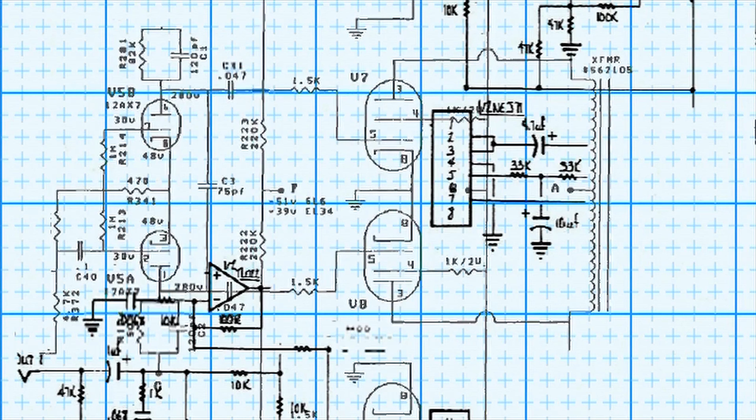The Paris Accords were created in response to this threat. They set a benchmark for countries to achieve carbon neutrality by 2050. While progress has been made, Canada seems unlikely to meet this goal unless drastic changes are made.

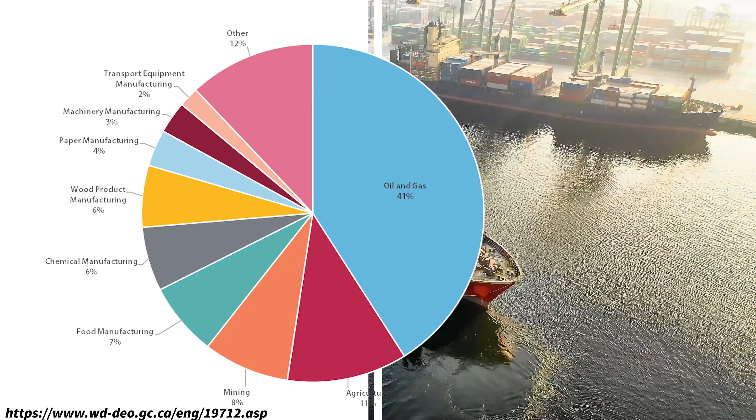Yet a transition to solely green energy is not realistic. The economy is heavily supported by Albertan oil sands, and a complete shutdown would be catastrophic to not just Alberta, but Canada itself. Blue hydrogen is at the center of our proposal, a cleaner energy derived from natural gas.

While not a permanent solution, the use of an already proven technology allows for a quick implementation. The use of blue hydrogen allows for a smooth transition into existing infrastructure once green hydrogen technology is feasible at a large scale. Blue hydrogen is the product of decarbonizing fossil fuels.

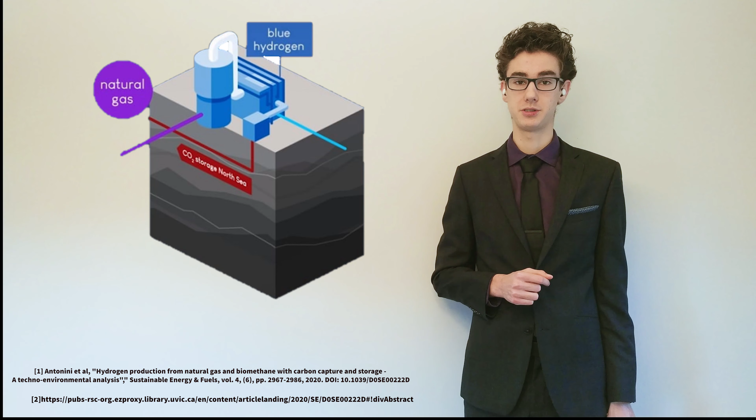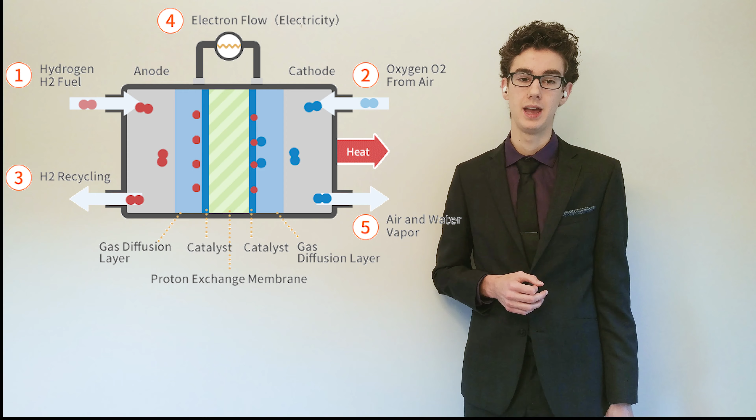Like fossil fuels, hydrogen can be used to power vehicles, homes, and cities. But unlike fossil fuels, hydrogen releases only water when combusted or reacted in a fuel cell, and fuel cells are more than twice as efficient as the internal combustion engine.

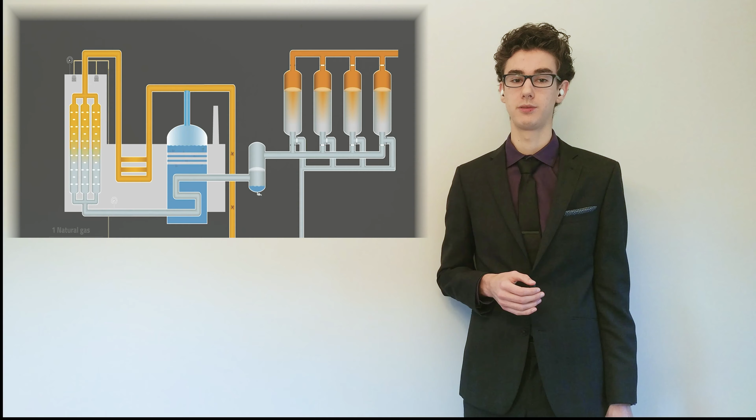Blue hydrogen is already produced from natural gas at scale, and new technologies are emerging to transform complex hydrocarbon fuels such as petroleum. Steam methane reforming, SMR, the most proven technology for producing hydrogen from natural gas, takes advantage of a reaction between gaseous water and methane to produce hydrogen gas and carbon oxides.

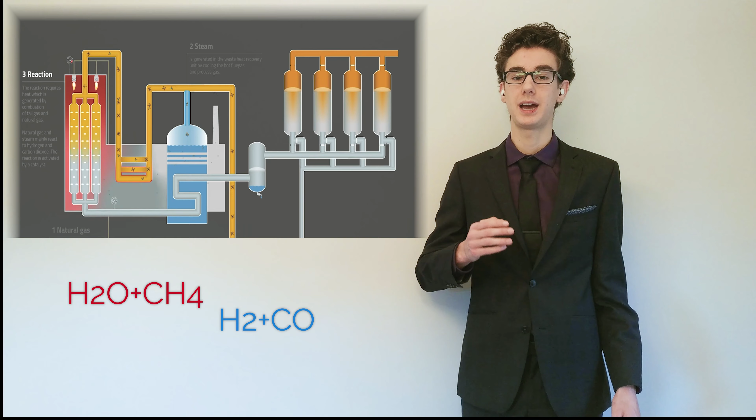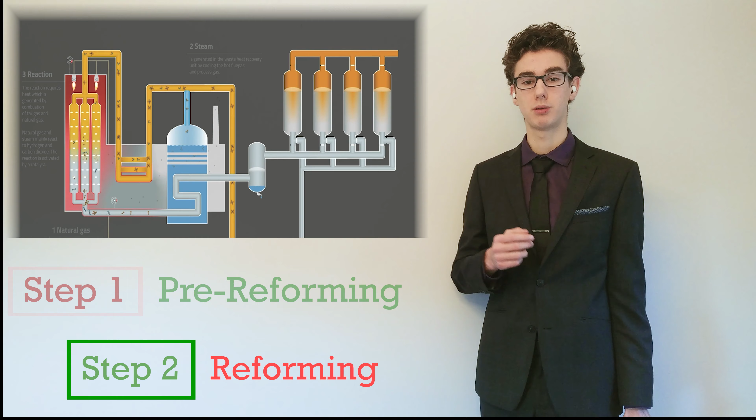Steam and natural gas are combined in two stages. The pre-reforming stage decomposes longer chain hydrocarbons into methane, and the reforming stage, performed in a furnace, allows the methane to decompose into a hydrogen and carbon oxide rich syngas.

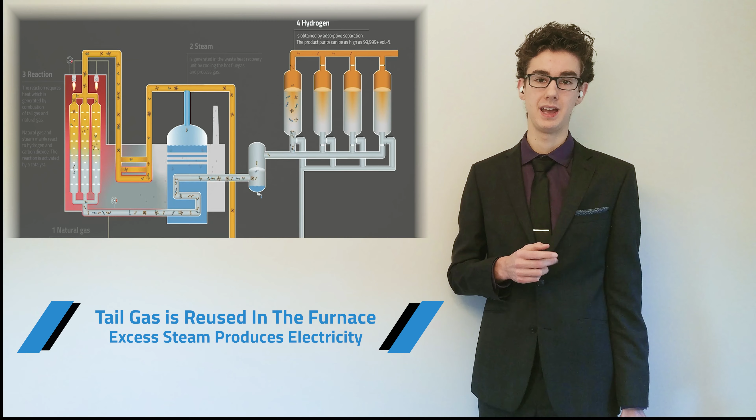The remaining stages separate the hydrogen from the syngas and recycle tail gas to the furnace. Excess steam from the furnace then moves to a turbine to produce electricity. This process releases carbon dioxide, about 60% of which comes from the reforming and 40% from the furnace.

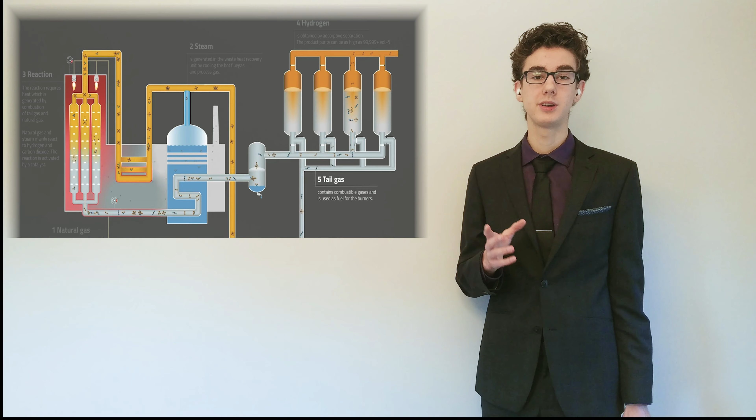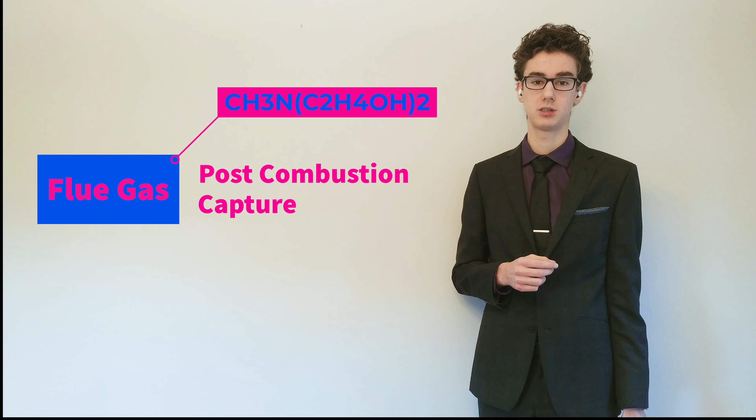The most common carbon capture technology for SMR is amine-based absorption using methyl diethanolamine. The syngas, in the case of pre-combustion capture, or flue gas in the case of post-combustion capture, is fed through an absorption column full of MDEA, which absorbs the carbon oxides in the gas.

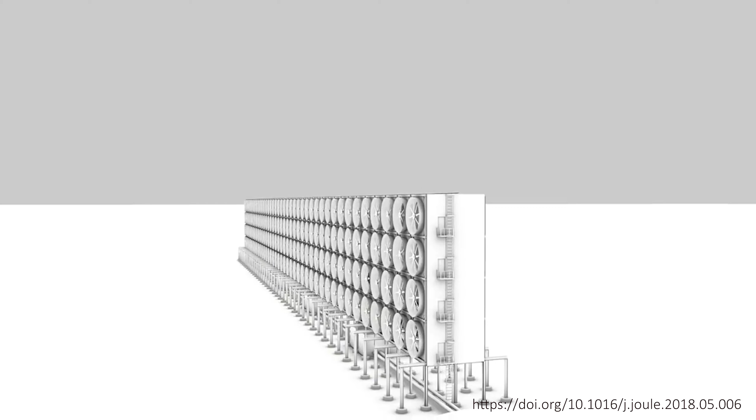Carbon capture uses an industrial plant which uses large fans to pull air which passes over a series of surfaces with a potassium hydroxide solution flowing over them. This solution binds with atmospheric CO2, removing it from the air and forming a carbonate salt.

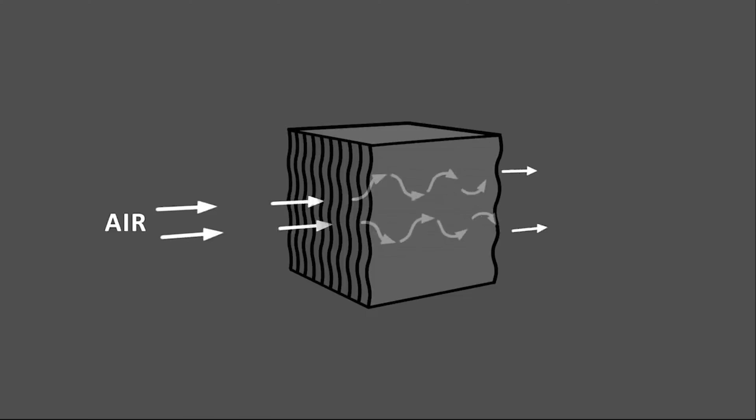This salt is then put into a pellet reactor along with an aqueous calcium hydroxide solution, which causes the CO2 to separate from the potassium and form calcium carbonate. The potassium is formed back into potassium hydroxide during this reaction, allowing for reuse, forming a sustainable loop.

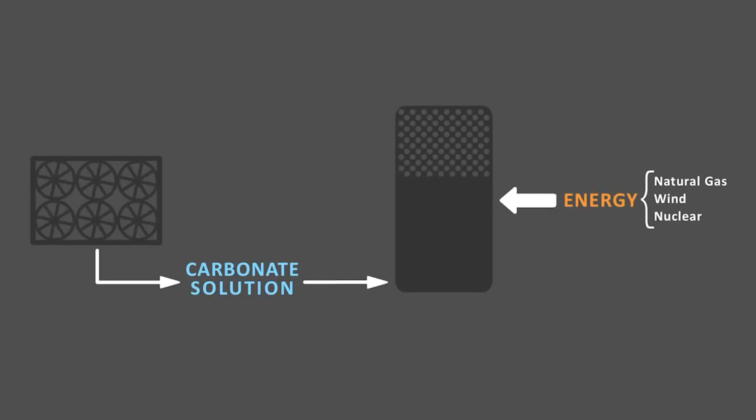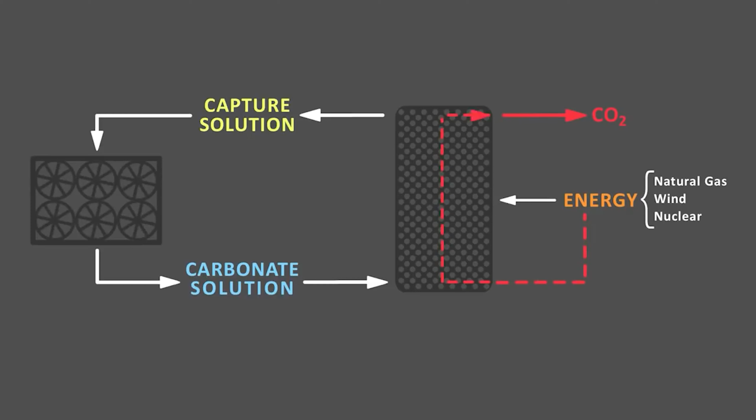The calcium carbonate is then put in a calciner, which separates and releases CO2 and calcium oxide, which is then combined with water, forming calcium hydroxide to be used back in the pellet reactor, closing a second final loop. The pure CO2 is then ready for permanent storage.

Alternatively, the CO2 can be combined with hydrogen to form hydrocarbons, creating synthetic crude for applications such as air travel, in which high energy density fuels are needed.

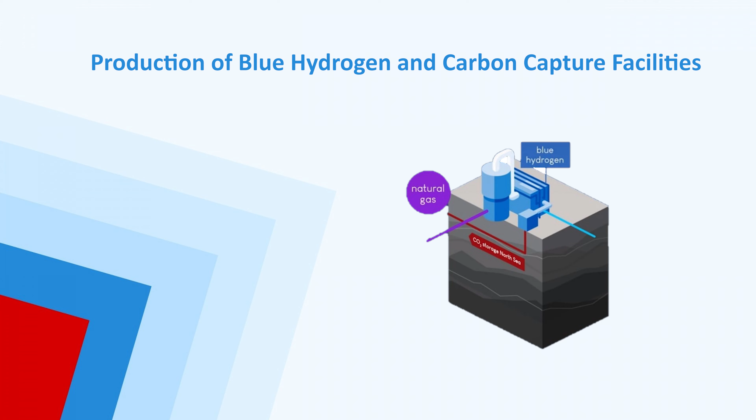Our proposal calls for the following to start immediately and be complete by 2050: the construction of blue hydrogen production facilities and projects to capture and sequester atmospheric carbon, the reassignment of our existing pipeline infrastructure to transport hydrogen and captured greenhouse gases, and finally, the implementation of infrastructure necessary for the future transition to green hydrogen.

Assuming private entities will cover operating costs, the capital investment required to build and repurpose the infrastructure capable of replacing our future domestic and export fossil fuel demand is about $550 billion. With a 50-year lifespan, that infrastructure will divert about 35.5 billion metric tons of CO2 emissions at a rate of $15.48 per ton.

So Canada needs to generate energy. Luckily, thanks to our unique terrain and environment, we're presented with the opportunity to use clean, renewable energy. A great example of how this can work is British Columbia, where over 90% of the electrical grid is run off clean, renewable hydroelectric energy.

Canada, being the country with the world's largest coastline, is presented with a unique opportunity to use tidal power. Canada being the second largest country, we could also use solar and wind energy.

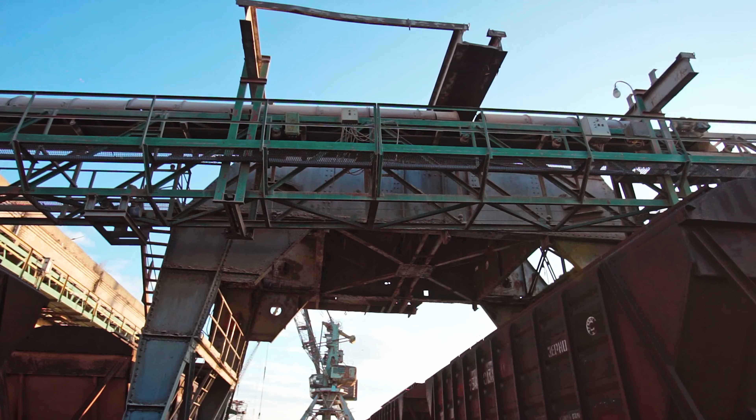While many technologies are in development as a potential solution, Canada needs one which is proven and can be implemented as soon as possible. Our system uses proven technology and provides a clear path for a transition to fully green energy. Canada has an opportunity that it must take advantage of.

And while the continued use of oil sands may seem like a step in the wrong direction, it is the only viable option. Canada relies on oil for the economy, and a cost effective bridge to a fully sustainable and renewable energy grid running on green hydrogen should be taken, not only to ensure a better life for us and our kids, but for their kids and many generations to come.